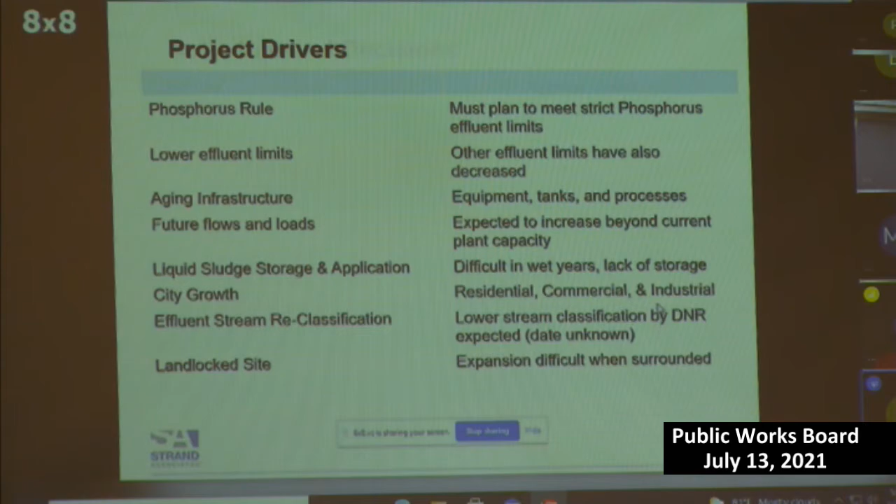This shows an aerial photo of the treatment plant, and I'll get into a little bit of the history here. I think you can see my cursor, right? So the original treatment plant was always located on this site along Rock Creek for as long as Bill can remember riding his bike down by the site. The original treatment plant was a trickling filter - it's kind of really old technology, the way it was oriented.

So in 1988, we started the design of the treatment plant that you see here today, with 2 oxidation ditches, as they're called. They provide aeration and break down the organic matter in the wastewater, along with the final clarifiers and some other processes that I'll describe.

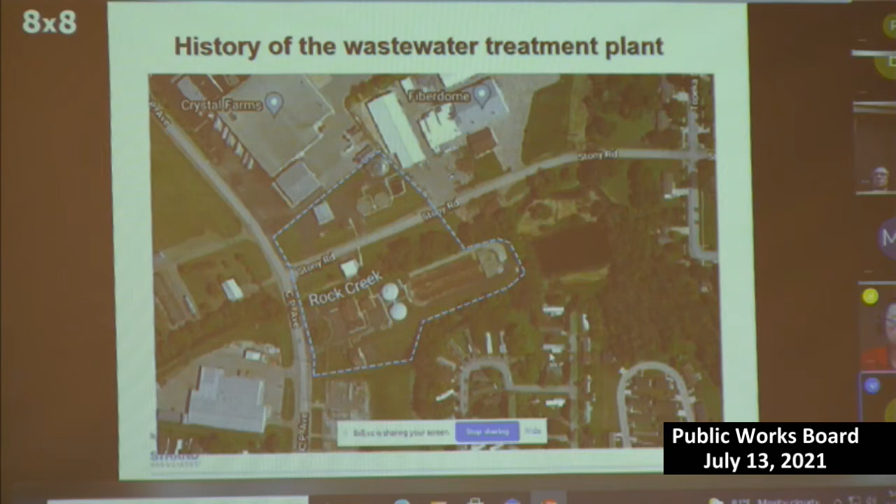So just a little background on how the wastewater treatment plant works, what the unit processes are. Sewage is collected from all areas of the city and comes into this first location, the influent pumping and screening building, where the wastewater is pumped up to a higher level so it can flow by gravity through the rest of the plant.

That's where screening happens to take out plastic materials and things you don't want interfering with your equipment downstream — it gets out rags and flushable wipes that really should never be flushed, and that type of thing. That material is hauled to the landfill.

Then from there, the screened wastewater goes to the oxidation ditches. These provide a natural breakdown of organic matter, similar to what you might see elsewhere in nature, but at a much higher rate because we're providing aeration and time, growing microbes in the system, and also recirculating them.

After the oxidation ditch, it flows to the 2 final clarifiers where those microbes settle to the bottom. Some of those microbes are recirculated back to the oxidation ditch to speed up that process a little.

The clarified effluent then goes on to the chlorine contact tank, where chlorine is added to disinfect and inactivate any pathogens. From there it goes to dechlorination to remove the chlorine residual, and aeration of the effluent. Then it's discharged to Rock Creek at about this location here.

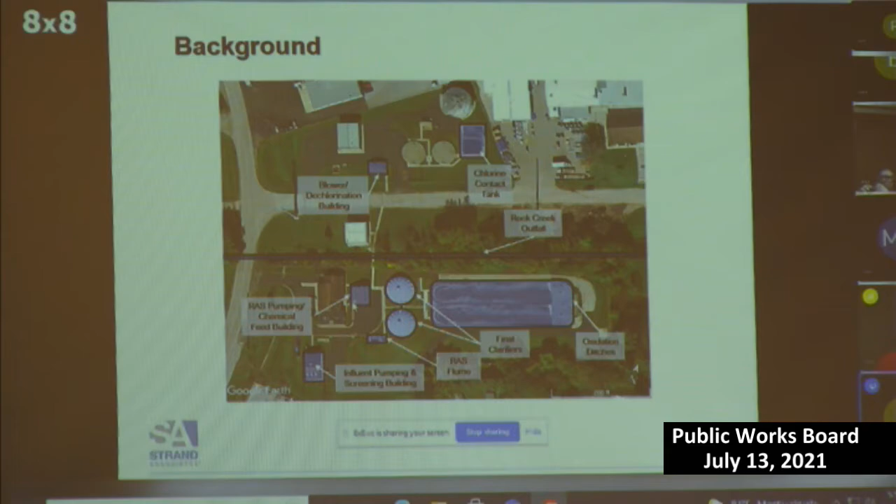This is what's done with the residuals from the treatment process. I mentioned there are return microorganisms sent back to the oxidation ditch, but they're always growing while treating the waste, so you always have to waste some of them. Some are wasted daily to a gravity belt thickener, where they're pumped across a belt and water drips down through it, while the sludge gets thickened.

It's still a liquid though, and it gets pumped to one of 5 sludge storage tanks. There's 2 of them here, and then 3 across the creek. Also shown here are septage receiving tank, where individuals and homes outside the sewer service area can have their septic systems pumped and the waste brought here. Sometimes holding tanks are pumped and brought here too. And then there's the sludge loading building. After the sludge is thickened and stored, about twice a year it's hauled to agricultural land and land-applied as a fertilizer and soil conditioner.

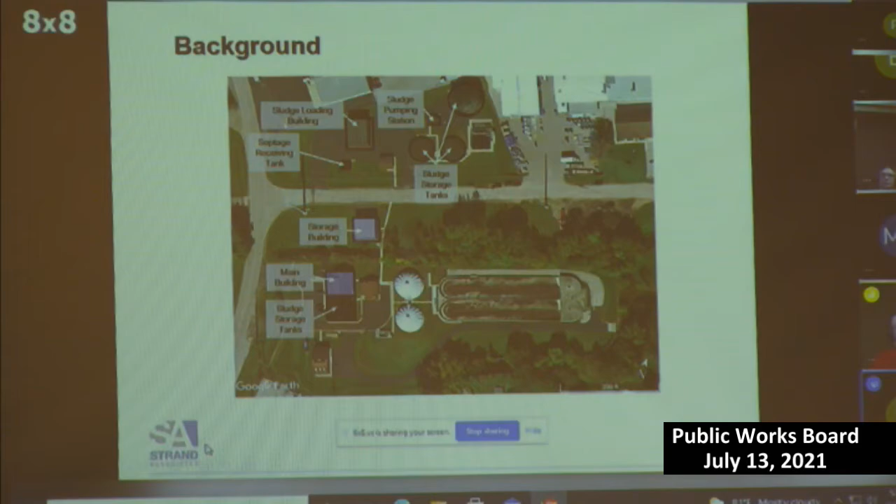Just some common abbreviations and terms you might see through the rest of this presentation. WWTP stands for Wastewater Treatment Plant, I'm sure you've figured out. Influent is the wastewater coming into the plant. Effluent is the treated water leaving the plant to Rock Creek. BOD is biochemical oxygen demand, a measure of the organic matter in the wastewater. TSS, total suspended solids, are the solids in the wastewater. Total Kjeldahl nitrogen includes ammonia and organic nitrogen, both in the wastewater. Total phosphorus is abbreviated TP. Million gallons per day is MGD, and pounds per day is LB per day.

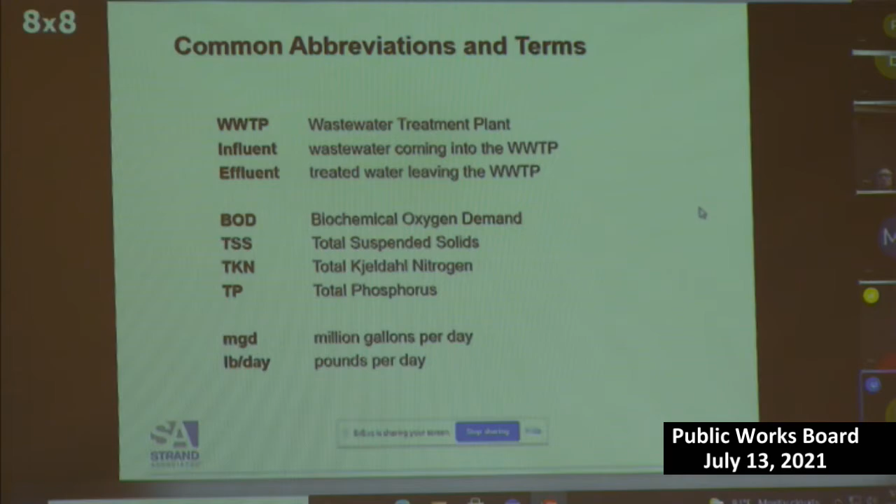This is the existing and projected design flows and loadings for the treatment plant. I won't go through all of these numbers, but the first column shows the current design flows and loadings, what the treatment plant is rated to manage right now—roughly 1 MGD and about 1,500 pounds per day of biochemical oxygen demand. In the draft facility plan, we've made population projections and projections of flows and loadings based on population projections done by others, like the state of Wisconsin, and projections in your comprehensive plan for growth in the city. We used that as the best available information to project the future. In 10 years, the design average flow may need to be 1.1 MGD, and in 20 years, about 1.2 MGD. Of course, that could change if big industry comes into town. Along with that, the loadings of all these parameters would also increase. Basically, between the age of the facility and this growth, essentially every process at the treatment plant is going to require upgrades or expansion within the next 5 to 10 years.

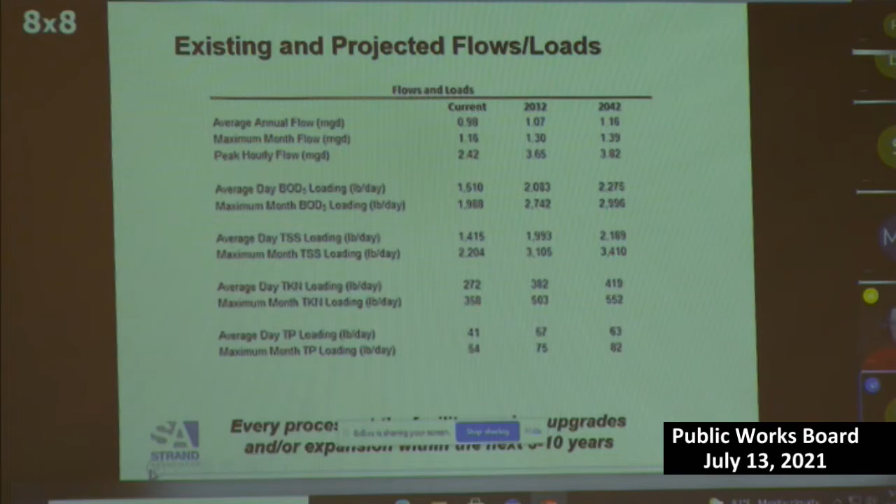Any other questions there? Okay, now Bill is going to go through a few photos to show you the condition of some of the facilities. I think Jane covered it a little bit, but the other thing is low flush appliances—new homes are all very water conserving versus existing homes, a lot of times, which are not. So that can impact the flow versus the loading as well.

So—Jane, help me out here. Is this?

Did it jump? Yeah, there's a down arrow if you hover. Oh, yeah, I'll get there. I'm going the up arrow. Apparently it goes the other way. Oh, I was right, okay.

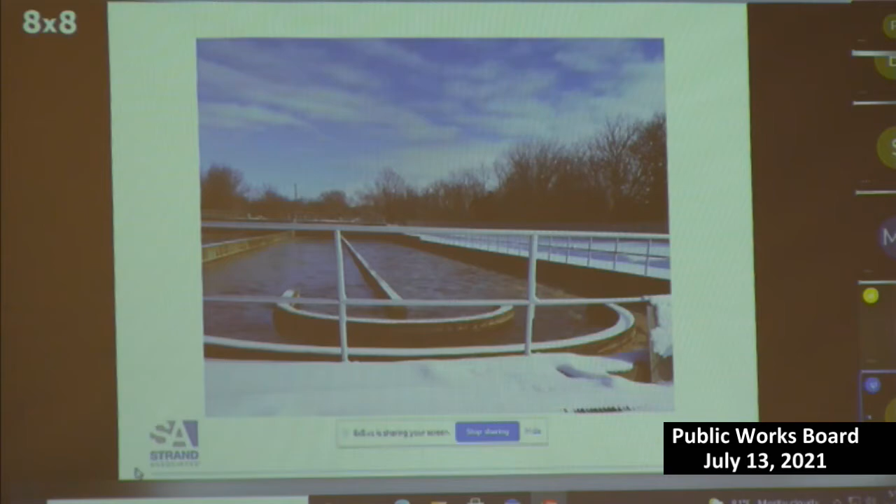Oops, I'm going the wrong way again.

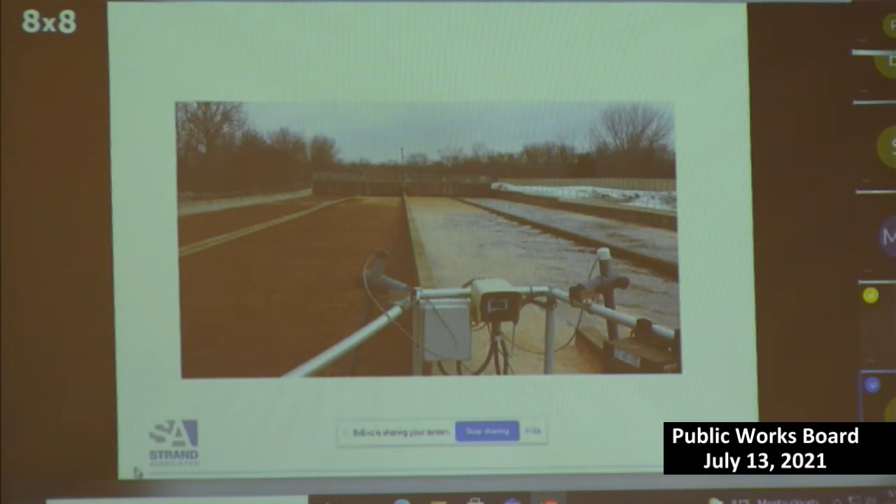This is what happens when that happens to us in the winter, and oftentimes it does, because the grease and things tend to float on top and collect in the winter. And once it freezes, actually we start wasting more solids into it. So I know a lot of you have heard me talk about this when I talk about upsets, is we actually lose control of the process, and as these microbes continue on the surface, and they freeze, we start to actually waste solids more or less into this mass, and we lose all of our settling, and we don't meet our limits.

If we don't get it off, again, we won't get control of the process. And if a big chunk breaks off and goes around, it could damage the aerating equipment and damage the plant.

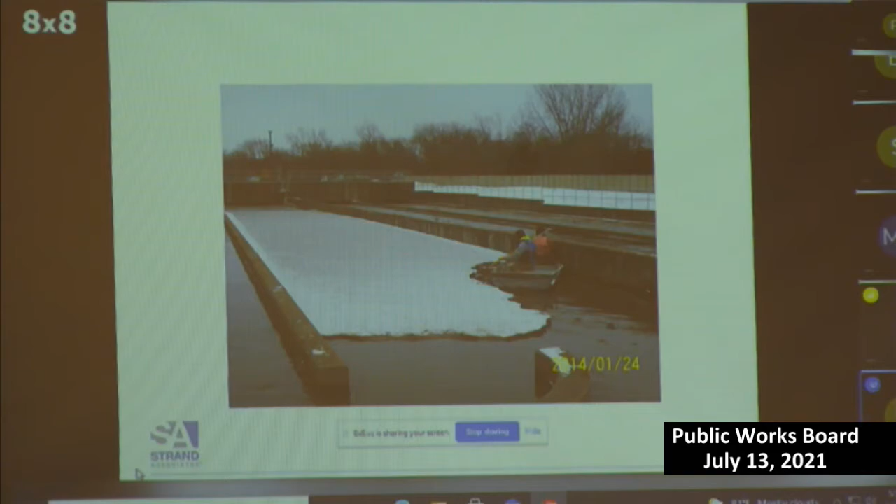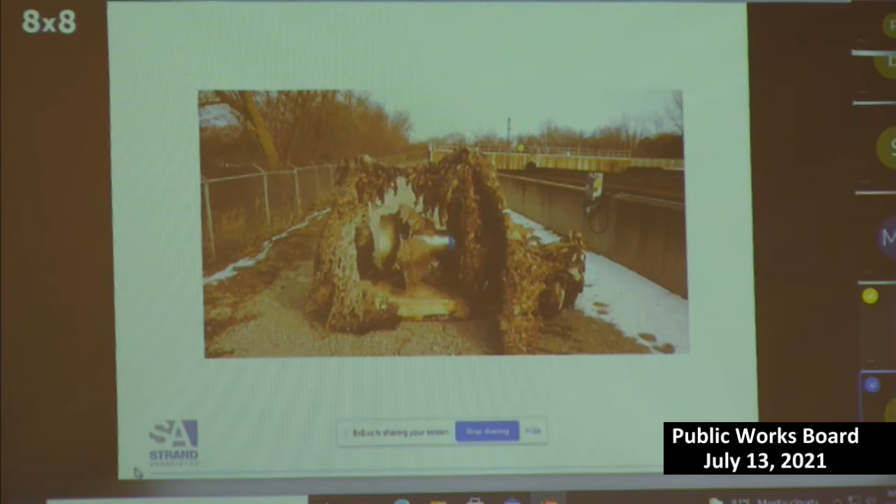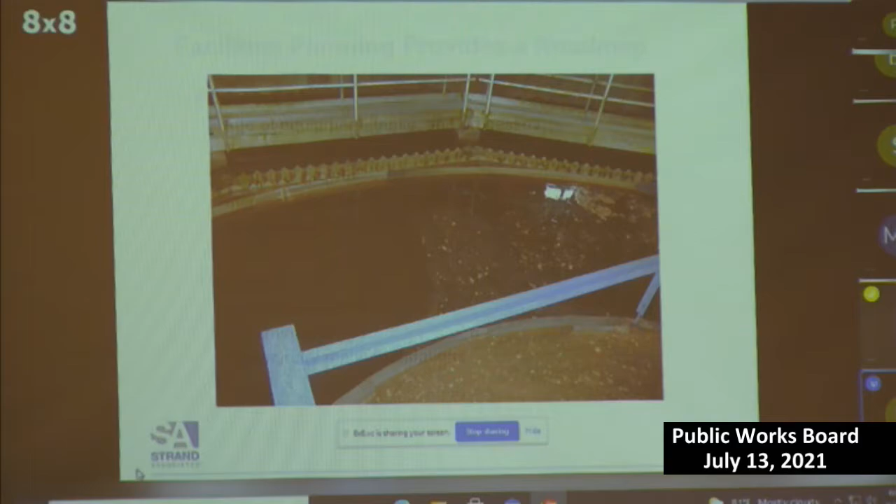And I guess if there's no questions on that, I'll give it back to Jane.

So for all those reasons, facility planning was begun last year. Facilities planning is meant to provide a roadmap for what the city can do to improve the wastewater treatment plant and address the age of the equipment, tanks and processes, which are all beyond their desirable design life. We usually design equipment to last about 20 years, so we're almost 30 years for much of the equipment.

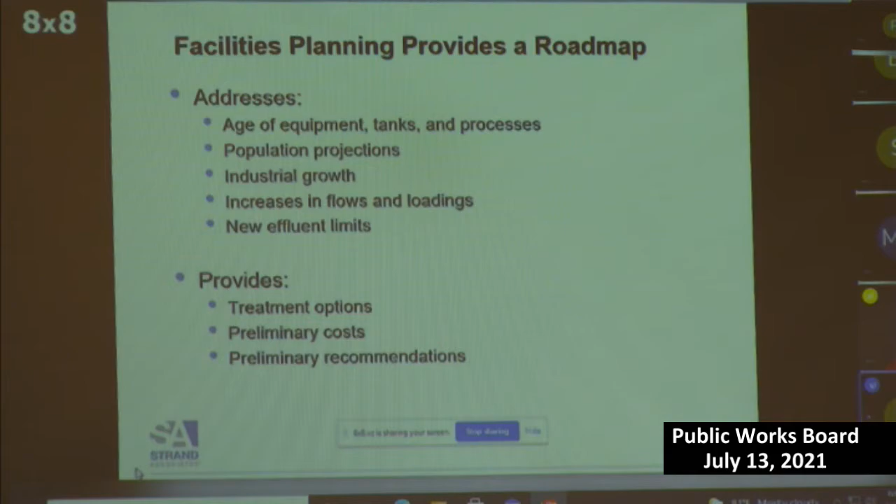Also considered are population projections, industrial growth, increases in flows and loadings from population and industry, and those new effluent limits. The facilities plan looks at treatment options and includes preliminary costs and preliminary recommendations. Some of that has been done to date.

When we started facilities planning, these are the current effluent limits for the treatment plant that are in the permit. There's ranges shown here, like for biochemical oxygen demand in the effluent, it's allowed to be from 10 to 14 milligrams per liter, and that range is because the limits are seasonal. In the summer they have to be on the lower end of the range, and in the winter they can be a little higher.

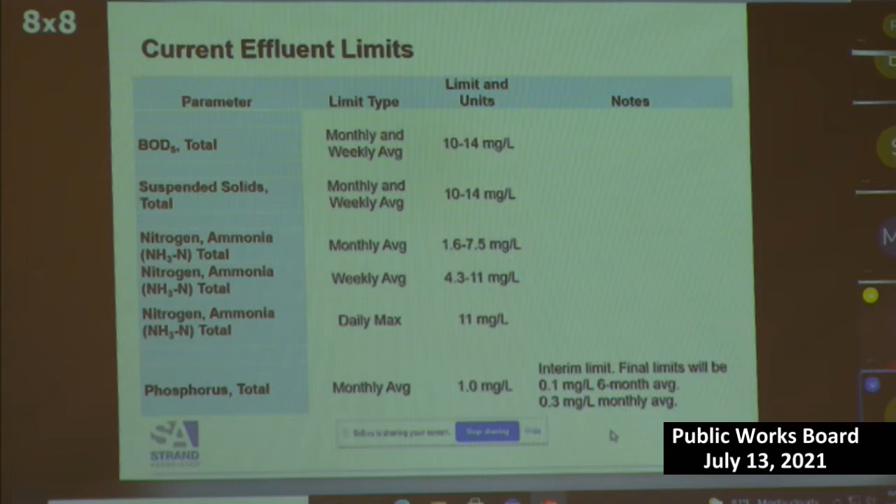Ammonia nitrogen is around 1.6 milligrams per liter monthly average in the summer, and phosphorus is 1 milligram per liter right now. The permit also includes that 1 milligram per liter as an interim limit, with final limits of 0.1 milligram per liter as a 6-month average and 0.3 as a monthly average for phosphorus. So those are very stringent limits. That's the basis we started the facility planning on, those current permit limits.

The phosphorus rule we mentioned is a driver for improvements at the plant, and that's the reason those future limits look so low. This was enacted in 2010, adopted by the state, and it's meant to address excess phosphorus, because that can cause an increase in aquatic plant and algae growth.

There's several compliance options available to wastewater treatment plants. The obvious one would be a facility upgrade to implement a tertiary treatment technology. Right now the treatment plant is considered a secondary treatment plant, with the biological treatment being a secondary process. Tertiary would be if you added an effluent filtration process or another process on the end to really polish that effluent and get the parameters much lower.

So that's one option. Water quality trading is also available, where a treatment plant might pay a farmer or a third party to reduce their phosphorus load, the idea being it would lower the cost of compliance. It's hard to do here, where Rock Lake is upstream, a little tributary to Rock Lake, and Rock Lake has a long detention time, so it's hard to find a trading partner upstream of the treatment plant here. Adaptive management is another option.

It's somewhat similar to trading, but it looks at meeting the phosphorus criteria in the receiving stream, so meeting 0.075 milligram per liter phosphorus in Rock Creek.

And then finally, the multi-discharger variance. This was a legislative option developed, I think about 5 years after the phosphorus rules went into effect, where the facility pays the county on a per-pound-of-phosphorus basis, and the county implements improvements in the watershed that lower the amount of phosphorus. It's similar to adaptive management or trading - it's just that you let the county take care of the reductions in the watershed.

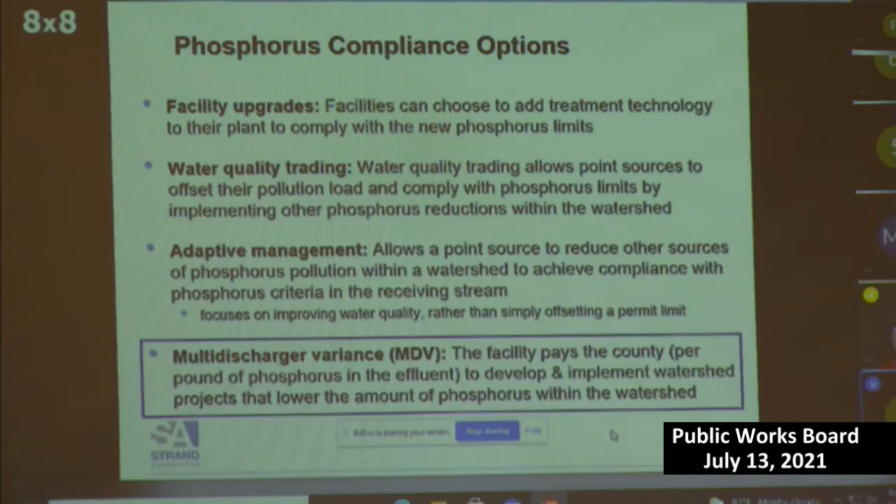The multi-discharger variance is required because of those really strict phosphorus limits. This shows approximate dates of phosphorus compliance if you didn't pursue the multi-discharger variance - with tertiary treatment needing to be online by 2025. So if you do the multi-discharger variance, it either delays or avoids those extra actions of building tertiary treatment at the plant, essentially.

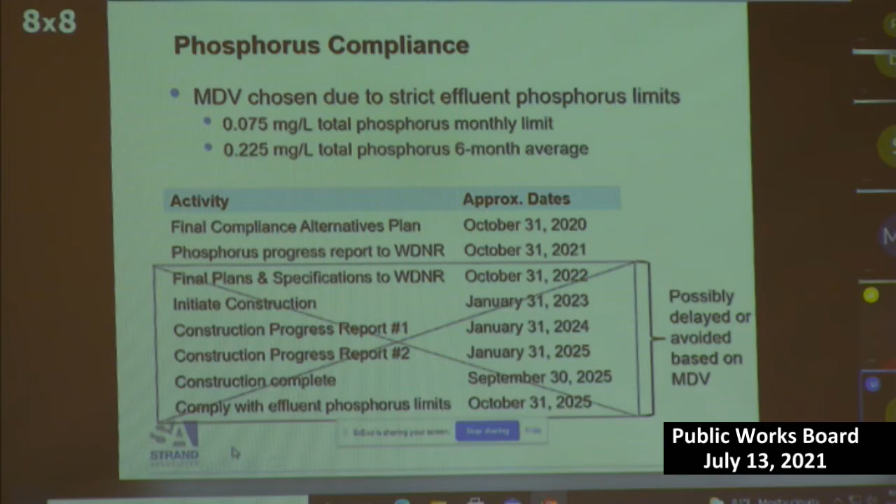So the permit application was submitted in April with the multi-discharger variance request in it.

The DNR has started to review that and submitted a request for more information, so we'll be talking with them about that. Basically, in order for the city to qualify for the multi-discharger variance, we have to show that the cost of improvements to the treatment plant will be such that residential rates will increase to 1% of the median household income, or MHI, or more. That's the threshold that needs to be met. Currently rates are quite a bit lower, around 0.6% of the MHI, so we're going to be talking with DNR about that more.

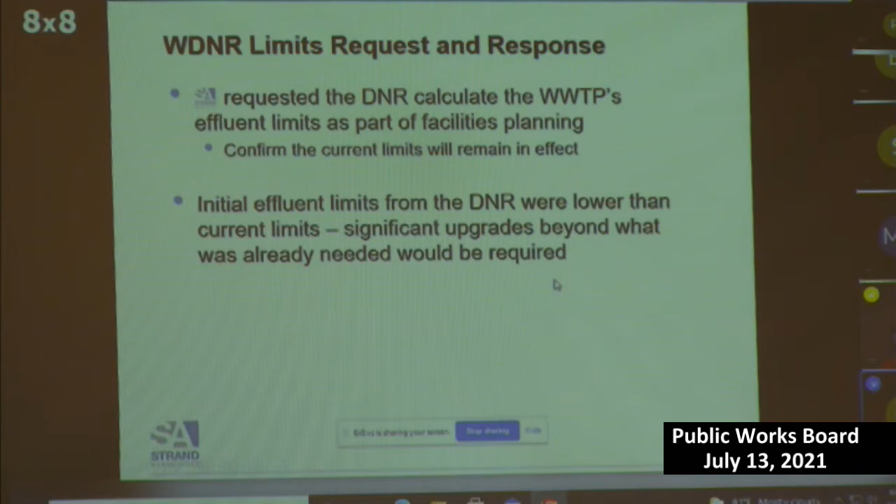I wanted to spend a little time talking about effluent limits. We sent a request to the DNR at the beginning of the facility planning process, as we always do, asking what they think the limits are going to be in the future, either confirming what's in the current permit or letting us know if they're going to change. It took them a long time to send us the limits for the plant, and when they did, they were quite a bit lower than the current limits, indicating that significant upgrades would be required beyond what was already planned. You'll see on this slide.

So for more than phosphorus, BOD limits would be cut in half about for the summertime - 5.5 milligrams per liter instead of 10 in the summer. Ammonia a little bit lower as well. An important one was phosphorus - we originally were planning on a 0.1 milligram per liter limit, and they told us it would be 0.075, which is as low as you can go when discharging to a stream. That doesn't seem like a big difference, but it is in terms of the technology needed to meet that limit, so it would drive up the costs.

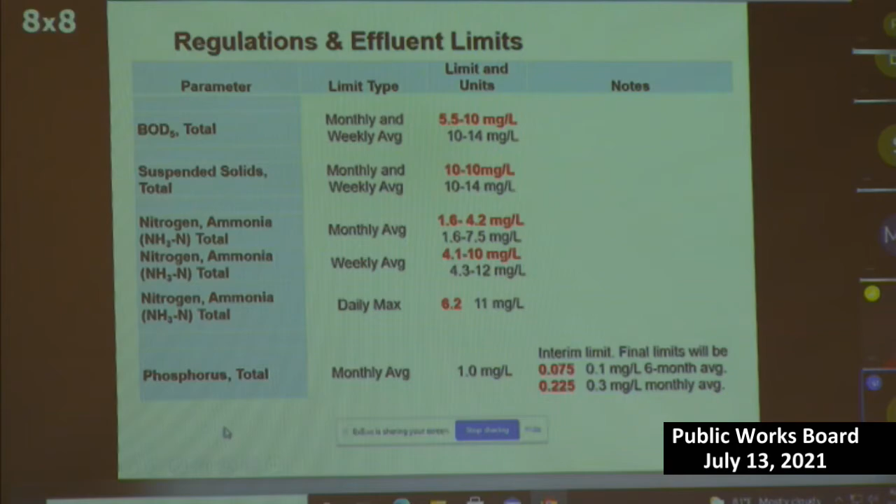So Strand looked into, with the city, how the treatment plant effluent limits could be less stringent. We requested that the DNR recalculate the limits for Rock Creek for the existing treatment plant, since they were using the wrong stream classification, as it turned out. We requested that they use the current stream classification and also look at what would happen if Lake Mills decided to discharge to the Crawfish River. Normally a larger river would have more dilution available, and you'd expect to have a little bit higher effluent limits.

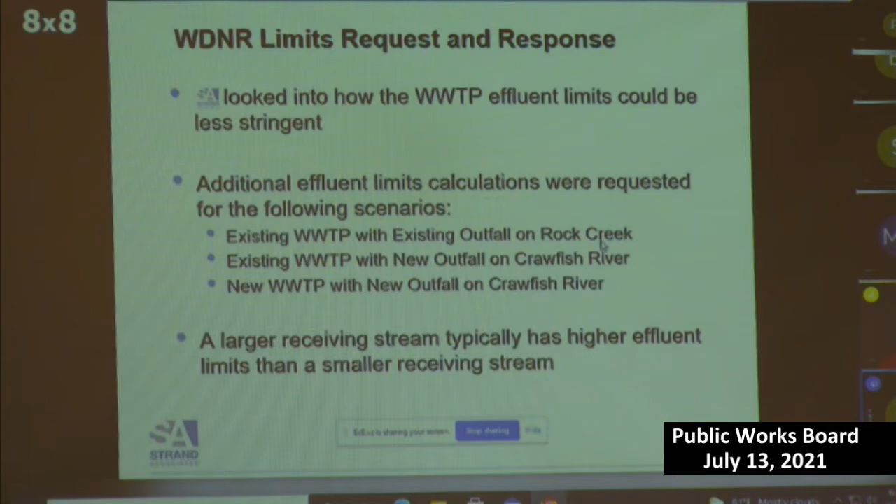So for the Crawfish River, we were looking at either keeping the treatment plant where it is and pumping effluent to the Crawfish, or having a new treatment plant near the Crawfish River. This is a map of what we sent DNR. The current treatment plant and outfall are shown here at the blue dot. For option 2, it would be to pump the effluent to a location somewhere along the Crawfish - we just assumed initially that you'd follow County B. For the third option of a new treatment plant, we assumed it would probably be north of I-94, but just somewhere within this area.

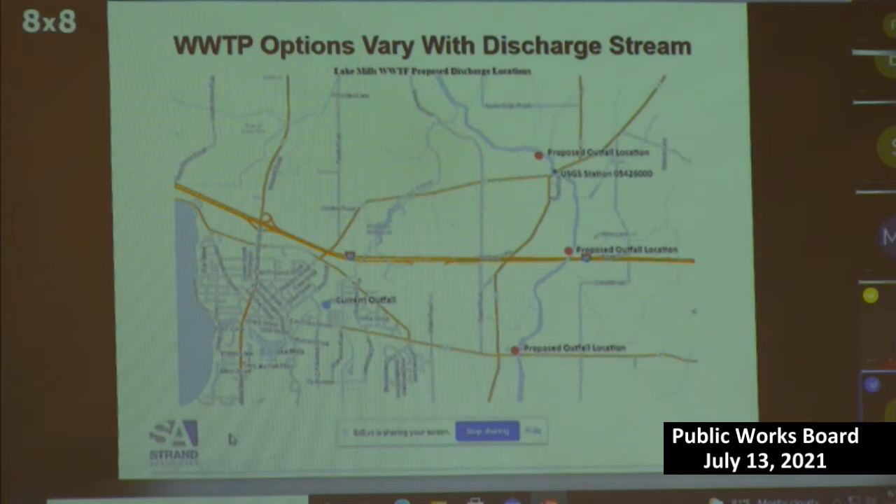The limits would be the same, as long as it was downstream of the confluence with Rock Creek, no matter where it's located. They did send us those limits, shown in this table. For the existing treatment plant, recalculated limits for Rock Creek turned out to be pretty much the same as what you currently have in the permit - maybe even exactly the same, except for phosphorus, which still stayed at that 0.075.

Then for the discharge to the Crawfish, if the current plant is used for treatment, you can't backslide from that existing treatment capability. So the limits would be roughly the same for all, except they did say that phosphorus would increase to 1 milligram per liter - that was somewhat surprising. Then for a brand new treatment plant discharging to the Crawfish River, it's kind of like you're starting over with a clean slate, so the limits would be higher.

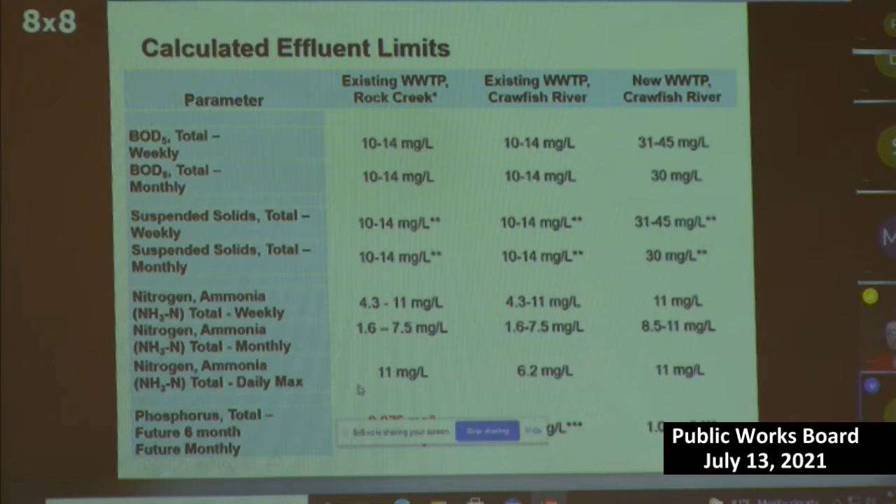The one exception is suspended solids, and that's what some of these footnotes are about. For total suspended solids, I'm sure many of you heard about the Rock River TMDL, or total maximum daily load, that was done by EPA and the DNR a few years back.

They did that TMDL for both phosphorus and total suspended solids, so they've capped the total suspended solids the city can discharge. As flows increase, the concentration of total suspended solids will have to decrease over time. That's shown here for weekly and monthly, calculated at that new design average flow of 1.2 mgd. Those concentrations get fairly low, about 8 milligrams per liter during the worst case month.

Any questions on that?

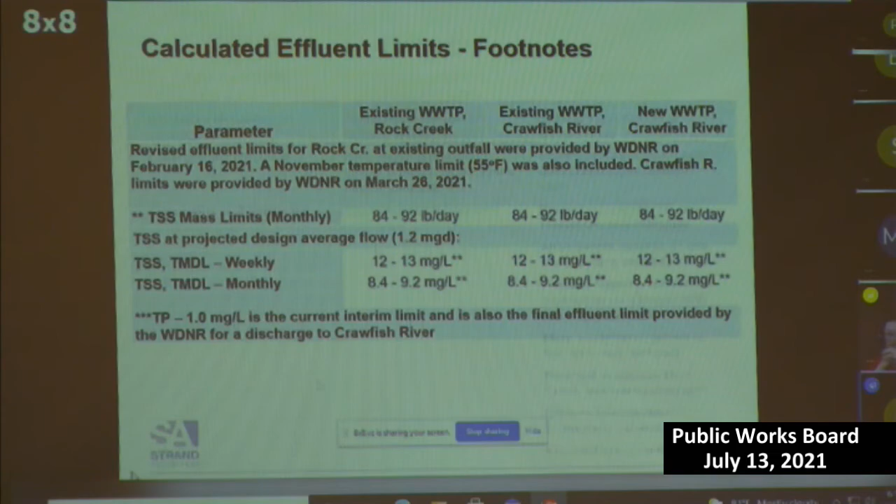Okay, so looking at these three options, we were thinking about non-monetary benefits. Some of these have costs associated with them, but kind of just the pros and cons of these three different alternatives. So first of all, the benefits.

If the existing treatment plant is left where it is with the discharge to Rock Creek, the benefit of pursuing that option is that there's already significant investment in the tanks and some of the longer term, longer life facilities at the treatment plant, and all the wastewater already comes there, so there's less pumping required. And there's familiarity from operations staff.

Then if the existing treatment plant is left, but the discharge is pumped to the Crawfish River, similar benefits, but you could also potentially keep that higher phosphorus limit that they mentioned. And another thing about the Crawfish is you might have lower ammonia limits in the future, but they wouldn't be as stringent as if you were discharging to Rock Creek.

And then finally, for the new treatment plant discharging to the Crawfish River, there's a lot of benefits to that. It would have the highest effluent limits, as you saw. You'd be better able to address future growth and future effluent limits because there's more room for those limits to get more stringent over time. You're starting at a much higher level, so you wouldn't expect anything too stringent in the near term for sure. And there's more opportunity for buffer between the treatment plant and residences and industries compared to what you have now.

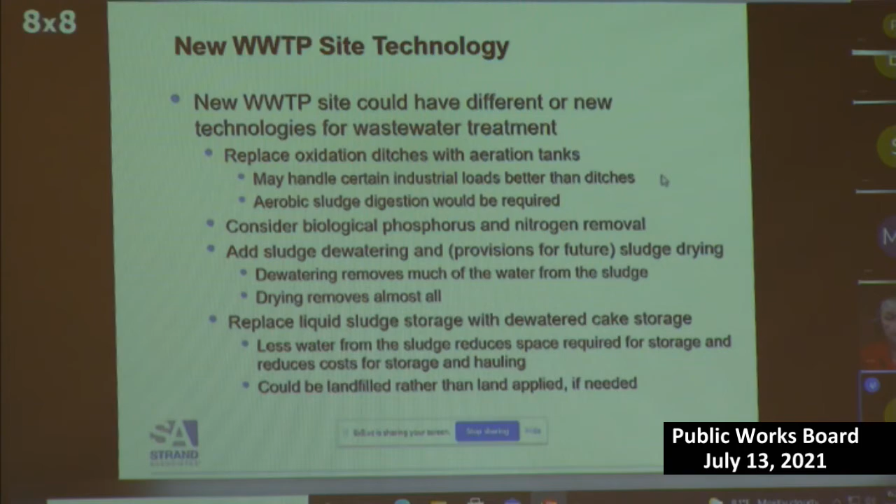As far as the impact on rates, it's really too soon to project those. It'll depend on things like the final technologies and the operation and maintenance costs, as well as the capital costs, and whether low interest loans and principal forgiveness are available—low interest loans are very easy to get, but principal forgiveness may also be a possibility, which would be like a grant for a portion of the project costs. Possible regionalization too, if you wanted to look into that with neighboring communities.

Grants can sometimes be found, or incentives for high efficiency equipment, and phased or stepped construction, which we do recommend you implement in phases if it makes sense financially. So that would all have to be looked at before we could give you an idea of the impact on rates. But rates would definitely have to go up with any of these alternatives.

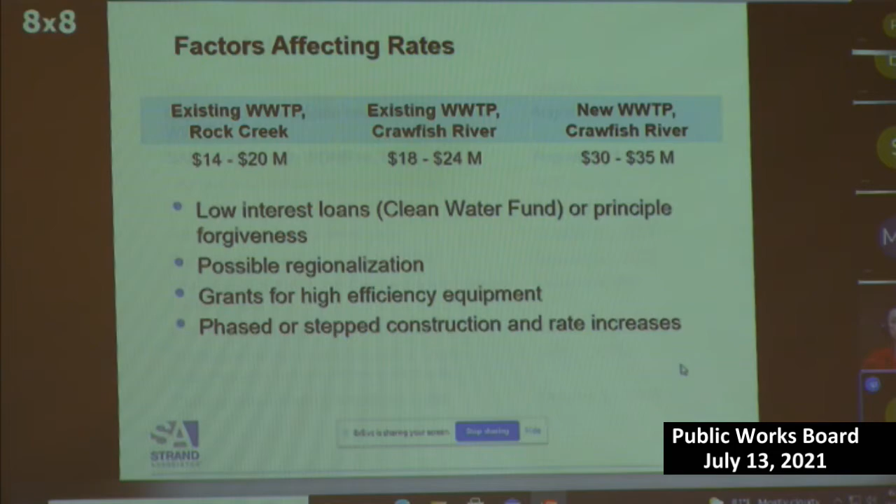Right now we've asked the DNR for an extension to October 31, 2021, so we can look into this if you'd like. And then we'd have to have time for addressing any DNR comments on that plan, as well as city comments and so on, and holding a public hearing likely in the beginning of next year. These last two items are only if you were to build tertiary treatment for phosphorus.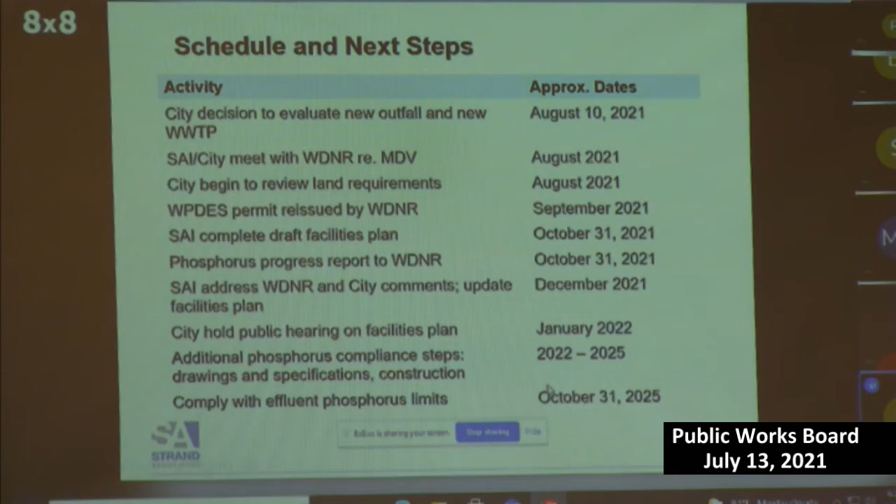So I think that was my last slide. Yep. Any other questions or anything you want me to go back to?

I'd like to make a comment about that. There's design life and then there's actual life. Those are two different things, correct? Yeah, they certainly are.

Is that your question, Paul? Yes, basically, if we replace the current plant now, then the current plant would have lasted 20 years. But if it's more cost effective, if the present value is more than 20 years out, it's not a very good investment, right? Yeah, it wouldn't be a good investment for an industry, for sure, if it's going to be replaced 20 years from now. So there's a disconnect there.

Okay, so I think what you see at a wastewater treatment plant is that you've got two different components. One is all the concrete, the concrete tankage and that structure, that doesn't have a 20-year life. That has a 40, 50-year life. There are tanks we're using in various treatment plants that are 50, 60 years old.